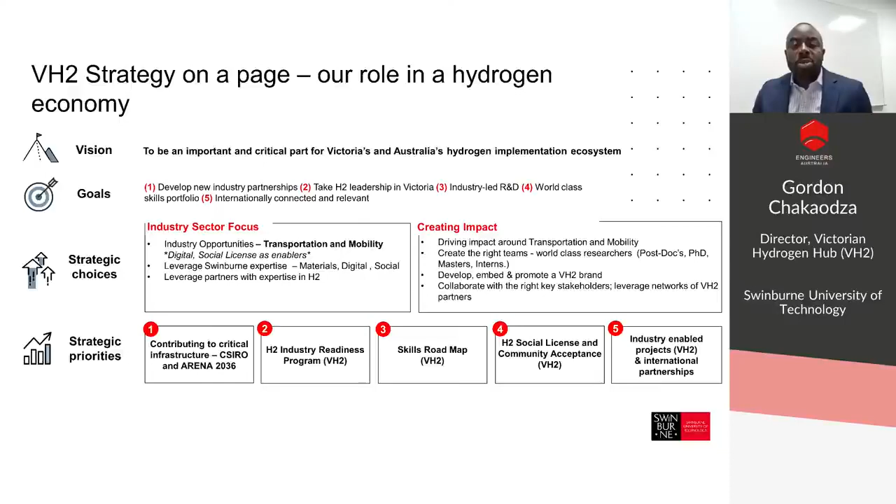Through our PhDs, we'll be working with industry to look at how we can work with industries which are hard to abate. You can see some of the industries our PhD candidates will be involved in, such as decarbonization of ports, hydrogen application in aviation, steel making, skills, and continuing to build our modeling strengths.

So I hope that gives you a snapshot of the Victorian Hydrogen Hub. I would now like to introduce our first speaker today, Swinburne's Professor Hussein Dia. Professor Dia's research is focused on disruptive mobility and harnessing digital innovations to unlock potential opportunities for low carbon mobility. Professor Dia is a chartered professional engineer, amongst other qualifications, and has also served as a board member of ITS Australia. Please welcome Professor Dia.

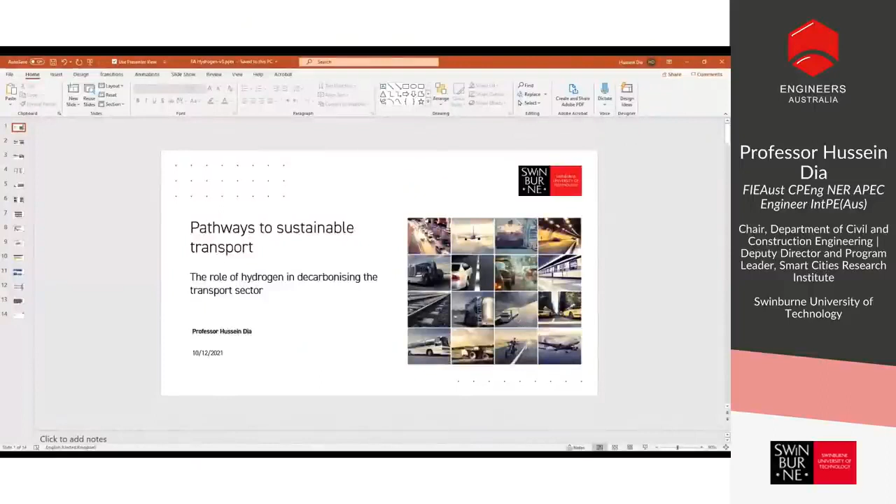It's my pleasure to be with you this morning to share some insights on the role of hydrogen in decarbonizing the transport sector.

Emissions from the transport sector continue to present major challenges to countries around the world. Overall, as of 2018, transport accounted for around 20% of global emissions. While some progress has been made in some developed economies to reduce emissions from transport, some emerging economies are actually moving in the other direction and contributing more. So that remains another challenge.

Around 75% of transport emissions, as you can see in the slide, came from road vehicles, approximately 45% from road passenger vehicles, including cars, and around 29% from road freight. Aviation and shipping contributed equal amounts, almost around the 11% mark.

As you can see, these top three sectors are the ones that are probably most ripe for decarbonization. Good progress has been made with the road sector, and I think there are many challenges remaining with shipping, aviation, and also road freight, where hydrogen can play a big role.

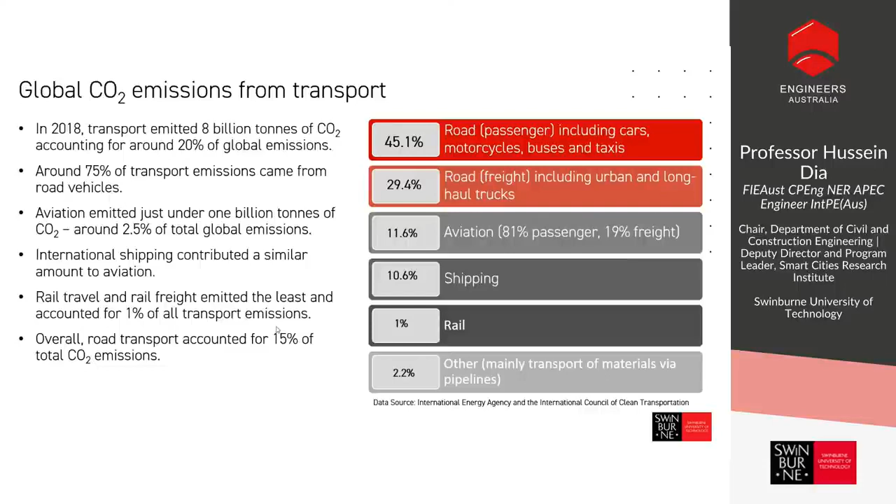In terms of the local landscape, it is a similar story. Transport in Australia accounts for around 17% of all emissions, with passenger cars accounting for around half of those emissions. The situation is a bit further complicated in Australia in that the transport sector has been for a while one of the strongest factors in emissions growth.

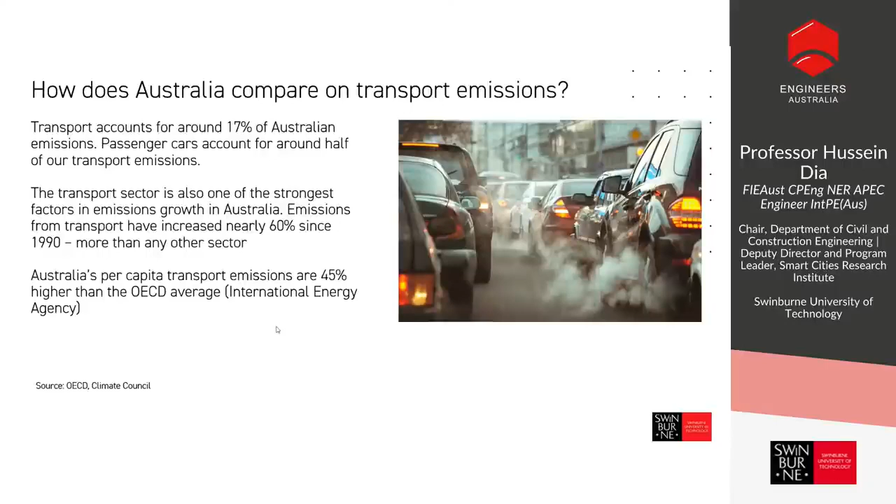Basically, emissions have increased nearly 60% since 1990, more than any other sector. And according to a number of studies, Australia's per capita emissions are 45% higher than the average OECD.

So Australia lags behind. In this particular scorecard, it ranked 20 out of 25 countries for transport energy efficiency. This scorecard looked at national effort, the decarbonization of buildings, industry, and transportation. As you can see, transport is one area where clearly a lot of work is needed.

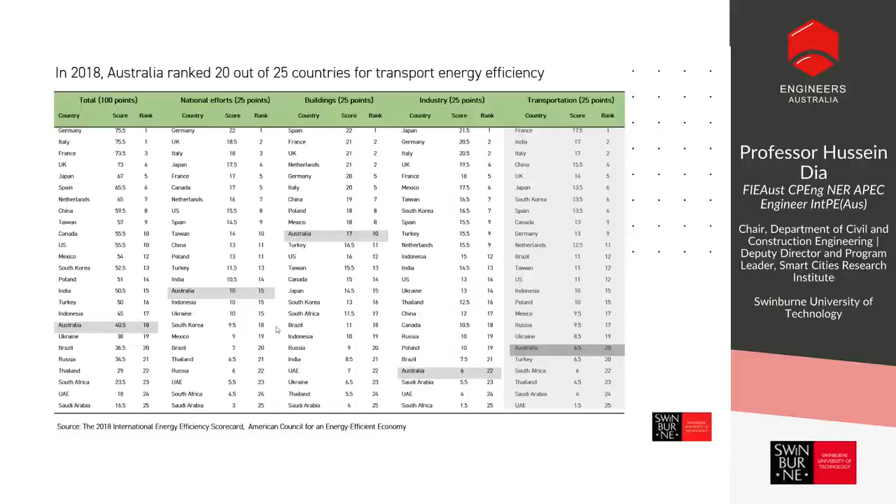Unfortunately, over the past maybe 30 years, the decarbonization of transport was not given a high priority on the agendas of transport planners and decision makers, who were basically dealing with much larger issues such as rapid urbanization, crashes, and congestion. Essentially, there was a lot of focus on the need to meet people's need for travel using motorized transport.

The good story, I suppose, is that over the last decade things have started to swing, and there is more focus nowadays on bringing emissions, energy provision, and consideration of climate change into the equation.

So the typical response policies in the past have been to build out of congestion, build more infrastructure, give more priority to the movement of vehicles, give more priority to motorized transport.

The new, more sustainable responses are more focused on managing the demand for travel, looking rather than just at the movement of vehicles, at the movement of people and goods, having a consideration of low emissions transport, more sharing, using pricing instruments, and so forth.

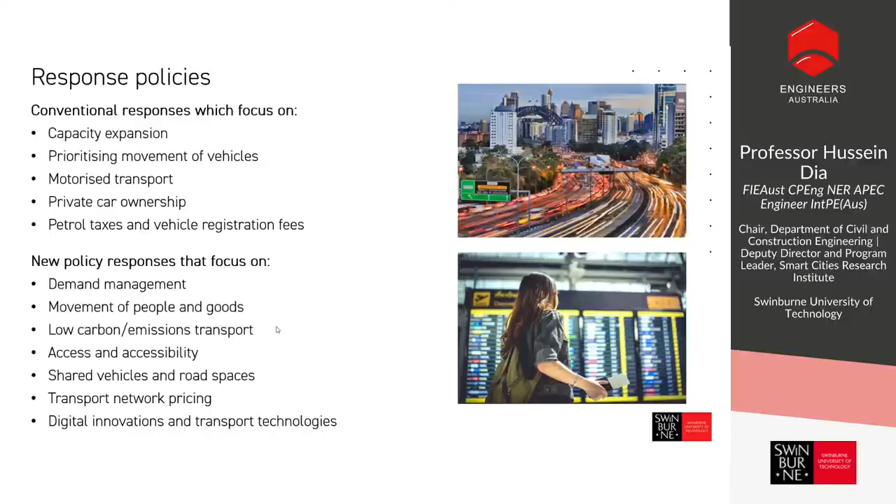In simple terms, we summarize the sustainable transport framework under the avoid, shift, share, and improve policies. So with avoid, you're reducing the need for travel, which is something we have experienced over the past two years by working from home. So telecommuting is part of the equation.

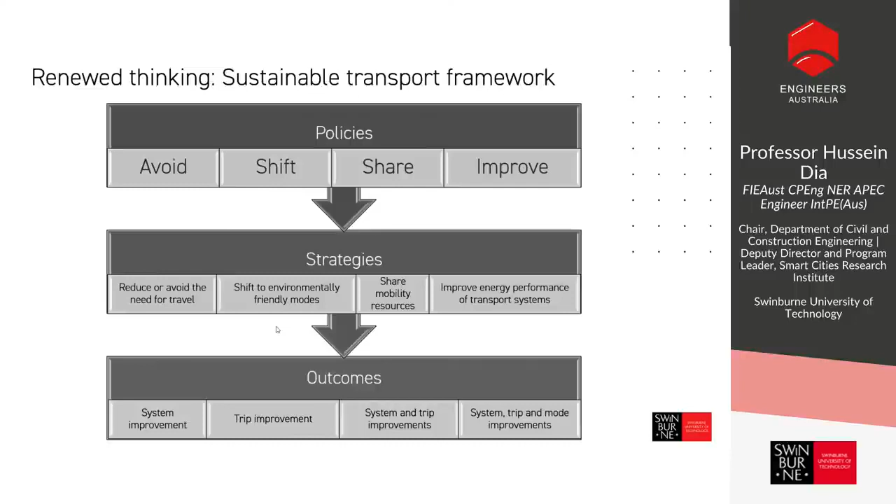Other strategies are to shift from energy intensive to more environmentally friendly modes, to share mobility resources, and improve the energy performance of the transport systems.

So we've been doing some research on this and looking at where to essentially target the research effort. We found that the avoid, or reducing the need for travel, strategies could actually pay the most dividends. So this is examples like travel demand management, telecommuting, virtual mobility programs.

The shift strategies involve shifting from private cars to public transport, to micromobility, e-scooters, e-bikes, walking, cycling, and so forth. Then sharing of resources - we've seen that over the past 10 years with the likes of Ubers and car sharing programs, ride hailing, and so forth.

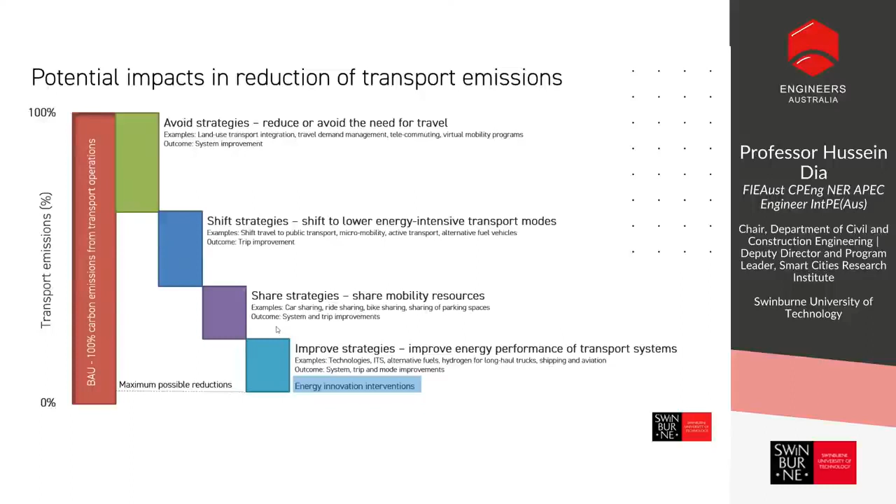And the final one, where technologies and alternative fuels come in as well, is to look at the improve strategies. This is where energy innovations come in. As you can see there, I haven't assumed that we're going to reach full reduction from 100% business as usual today over the next 10, 20, 30 years. It is possible that we won't get exactly to zero, but the intention is to get as close as possible to that.

This brings in the hydrogen equation as well. Hydrogen is expected to play a big role in decarbonizing a number of industrial and transport sectors. As you can see here, this is a big shopping list of possible use cases where hydrogen can be beneficial. As you can see on the right, aviation and shipping particularly, and land transport are part of the mix.

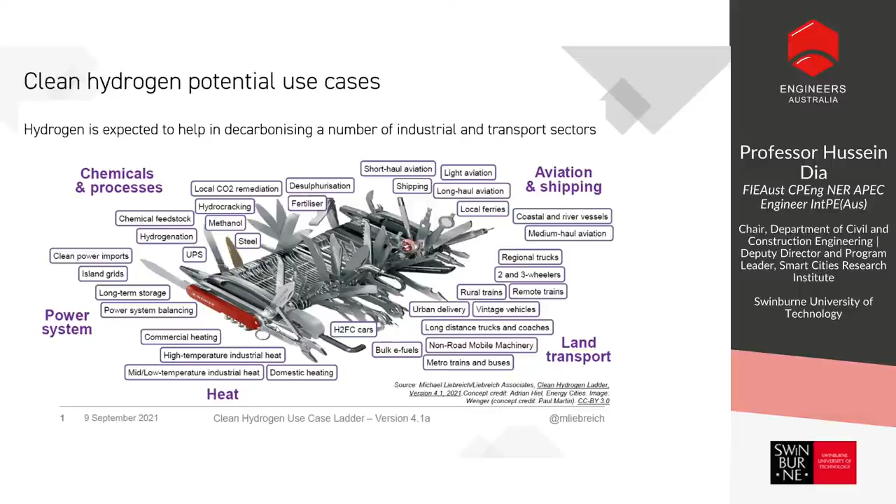Hydrogen could play a very big role in some of these use cases, and it could play a minor role in other applications.

I think particularly as we look at decarbonization of the transport sector, three of the biggest challenges remain shipping, aviation, and long-haul freight, where we still need more research clearly.

This diagram essentially shows that as you climb up this ladder, the use cases become much more challenging to decarbonize, but at the same time they open opportunities for hydrogen to have a role. However, hydrogen would need to compete with other alternative or new technologies or solutions that are being proposed.

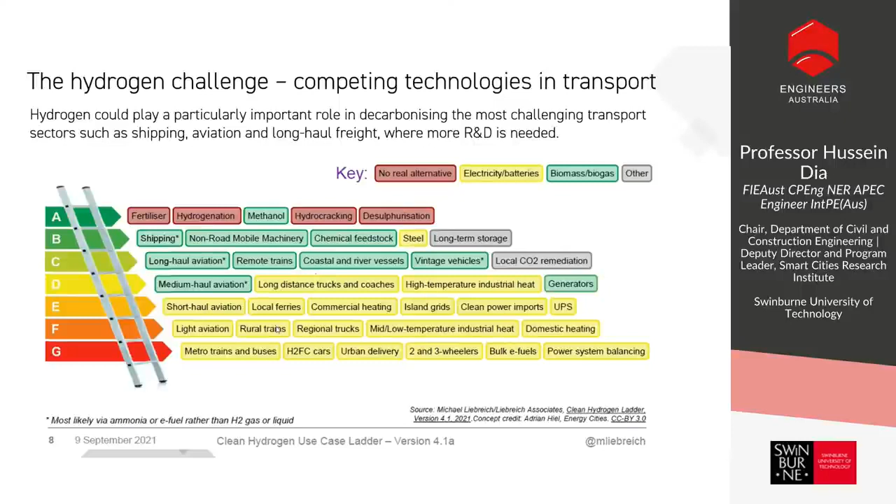It needs to compete based on cost, and in transport based on range, where it actually has the upper hand compared to other solutions, as well as safety, public acceptance, and so forth.

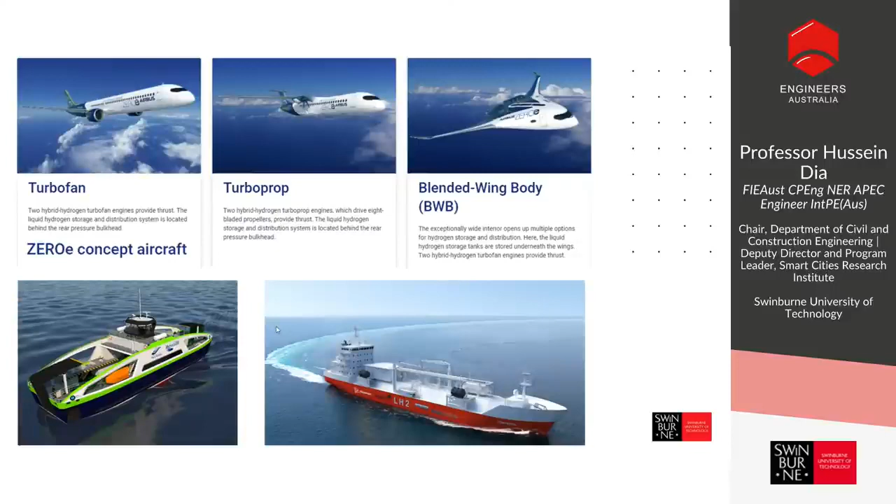When we talk about some of the current research in order to essentially establish which use cases could have the best or most impact, one way to address this, which we're doing through a current research project, is to look at life cycle analysis or assessment.

This particular project is looking at using the GREET model, which is a life cycle assessment model developed by the Argonne National Laboratory in the US. To our knowledge, it hasn't been calibrated for Australian conditions yet, though it has been used widely overseas.

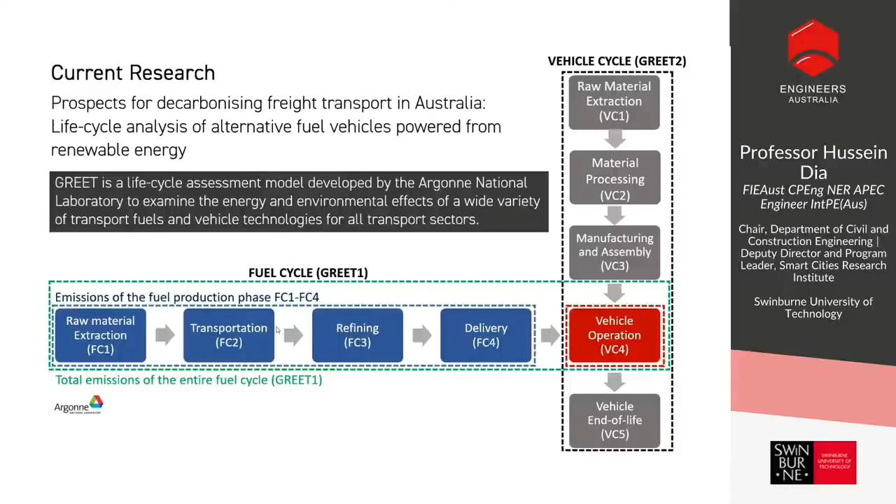This project would look at using this particular model to examine the prospects for decarbonizing the freight sector in particular, using renewable energy.

Before I leave, I would like to leave you with a thought. Even if we make each and every one of these vehicles hydrogen or electric vehicles, we are not going to be able to solve a lot of the challenges I mentioned before. One of the difficulties we have, for example, is that in Australia, if you stand on the side of the road and look at how many people are in a car, it's on average 1.2 to 1.4. So around 80% of car journeys to work have no passengers.

So we need a holistic approach. We are all for alternative fuel vehicles, but they need to be part of a holistic solution where we also look at the sharing of resources. And also, because we are going to be relying on renewable energy, we need to select applications where there will be the best return on investment, if you like, and also the best return on the conservation of resources.

Thank you for your time. This concludes my presentation.

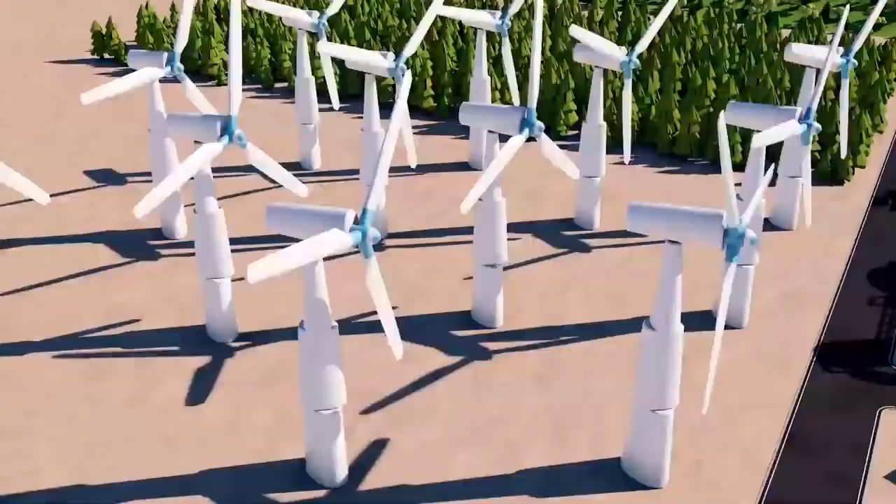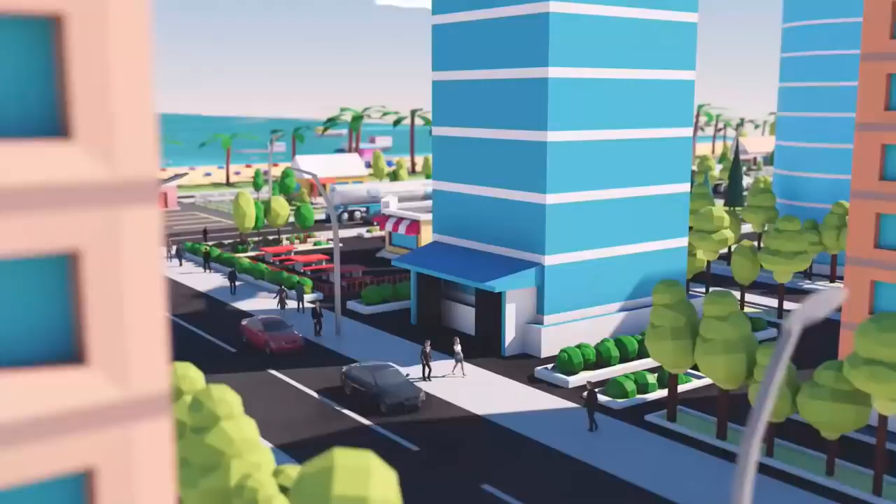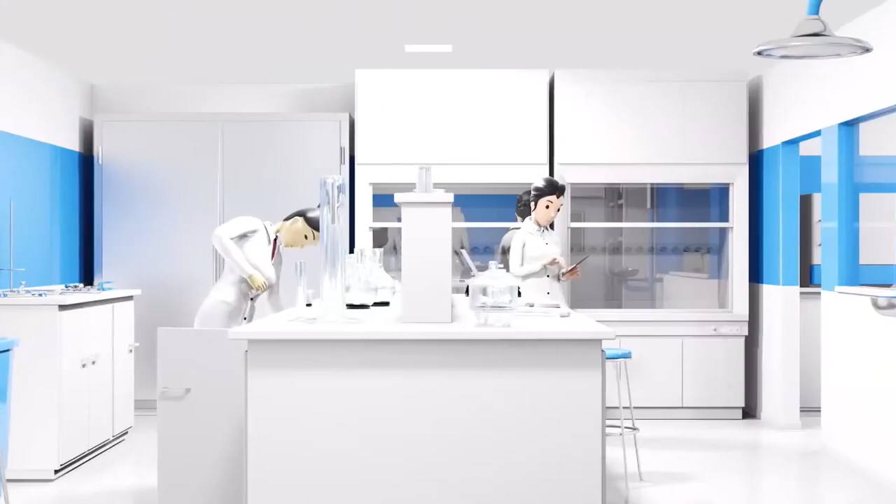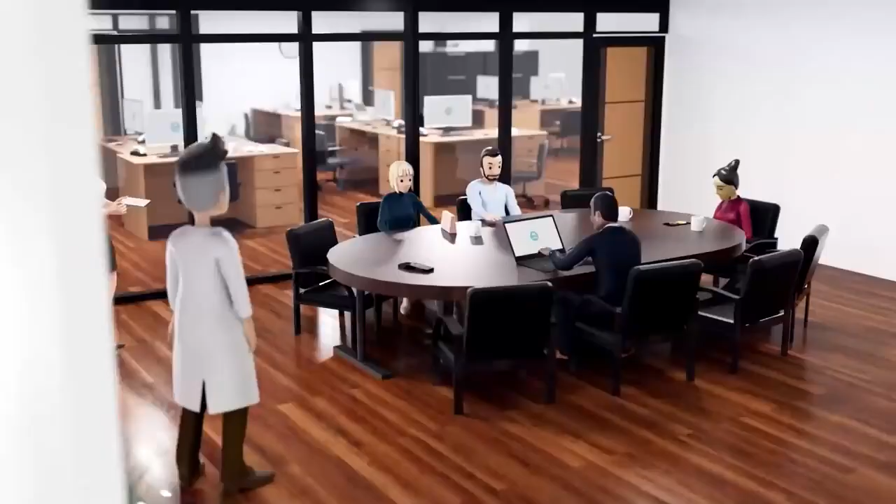Tackling climate change means we have to work hard to reduce our greenhouse gas emissions. We've made huge strides in the use of renewables to produce electricity, but some sectors are harder to decarbonise. This is where hydrogen comes in. Hydrogen can be used in a variety of industrial and domestic applications, and importantly, whenever it's used, it produces no greenhouse gas emissions. Australia is perfectly positioned to establish hydrogen export supply chains, which presents real opportunities. It's estimated that a clean Australian hydrogen industry could create 8,000 new jobs, generate $11 billion in GDP a year, and reduce greenhouse gas emissions. With a strong global market pull, technological readiness, and an appetite for the potential of hydrogen, we're at a critical stage. Challenges remain, however. Hydrogen is still expensive to produce relative to current fuels, and using it requires new technology and infrastructure. CSIRO's Hydrogen Industry Mission has been created to help focus research and development on solving these challenges to accelerate the development of Australia's domestic and export hydrogen industries. With our partners, we're supporting hydrogen knowledge sharing, informing best practice through feasibility studies, demonstrating hydrogen technologies and infrastructure, and delivering practical research which helps de-risk hydrogen industry investments. The mission's success depends on strong collaboration across industry, research, and government. For more information on how we're looking to collaborate, visit our website.

What we're here talking about today is, of course, demonstration projects. The phase, the stage that the industry is at the moment, really, is demonstrating hydrogen technologies across many of those different value chains that we heard about previously.

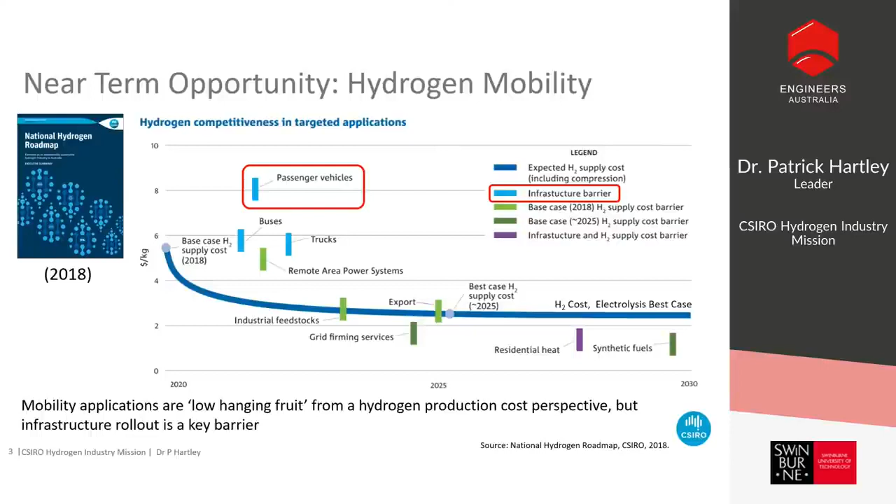So mobility is a near-term application. As we move to the right of this graph, and costs come down further, that's where hydrogen can play a role in many other industrial sectors. Recognizing that, back in 2018 was really the genesis of the project we're here talking about today.

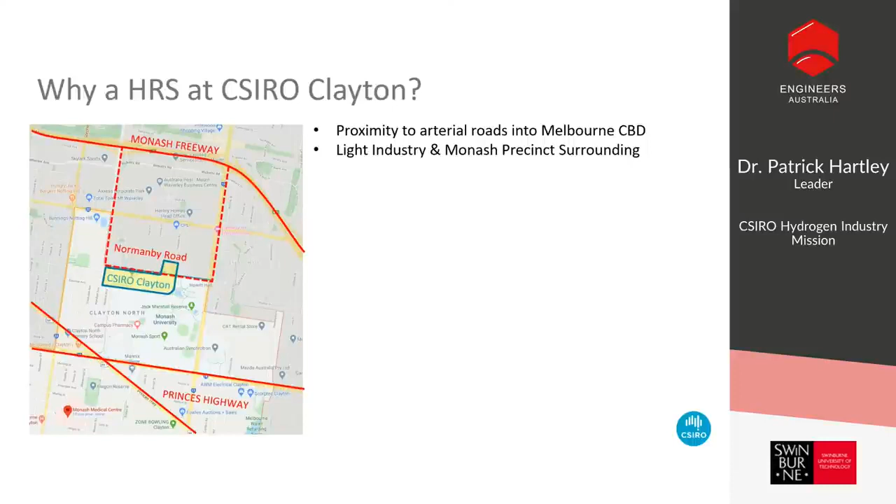We felt there was an opportunity for CSIRO to leverage our infrastructure and our skills. We've been working with hydrogen for many years from a research perspective, and our site in Clayton, where I'm normally based when I'm not looking at hydrogen liquefaction plants, is actually a pretty good location for installing refueling infrastructure. We're very close to major arterial roads heading into the Melbourne CBD, the Monash Freeway and the Princes Highway, to the southeast of the city, about 20 minutes away. We have Monash University to our south, and around us to the north is a kind of light industry area, so it's actually quite a good spot for allowing people to try hydrogen technologies and hydrogen vehicles.

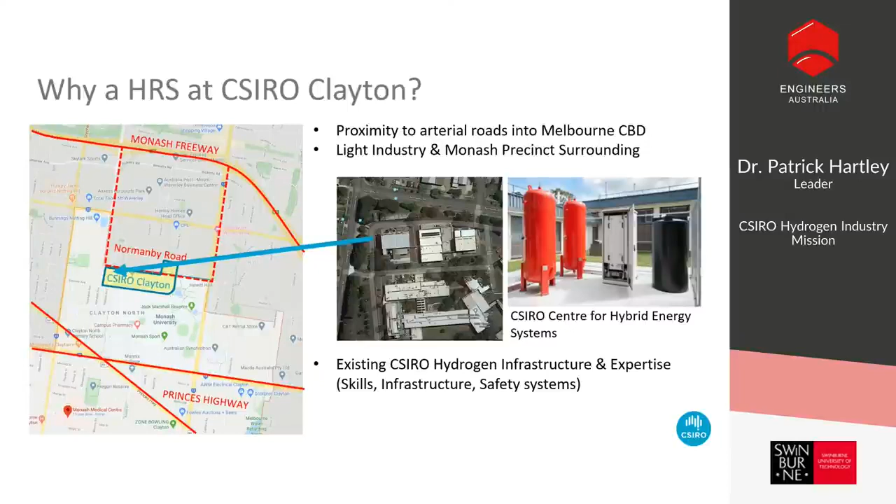As I mentioned, we've got existing infrastructure, things like our Centre for Hybrid Energy Systems, which already has hydrogen technology under development as part of it, all on that site. So we're well equipped with the skills, the infrastructure, and most importantly, the safety systems to install things like hydrogen refueling systems. The project concept was that we wanted to couple an end-use demonstration, a commercial demonstration effectively of hydrogen refueling, with research and development.

You can see here how that works. We have a building which is very much a part of the Victorian Hydrogen Hub, which we're fitting out with hydrogen equipment and infrastructure, where we will be demonstrating hydrogen production, storage, and utilization technologies, stitching those together with an end-use demonstration of a real commercial application in vehicle refueling.

I'm glad to say we haven't got our refueler yet, and we'll come to that in a moment. But we already have a hydrogen vehicle in our fleet, which we've leased from Toyota. That's actually sitting just outside the window here, and very nice to drive, I must say.

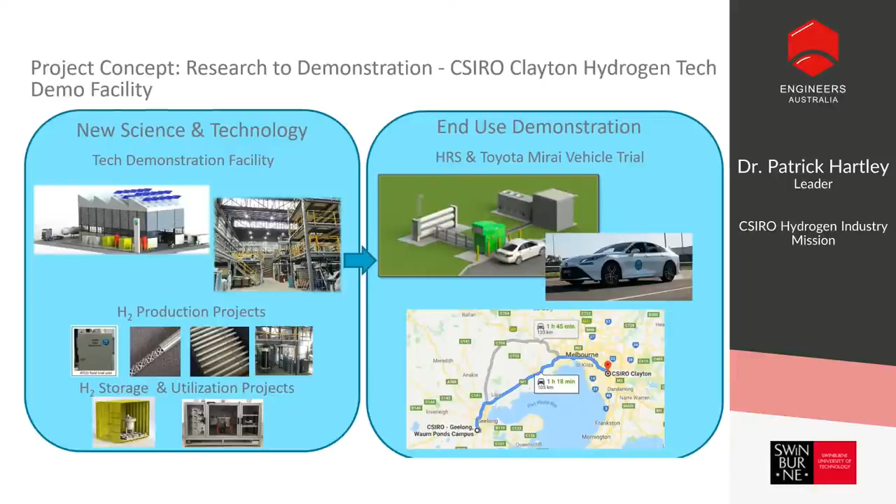You can also see here we have two sites basically in the Melbourne area: CSIRO Clayton, which I've been talking about, and our site down in Geelong as well. It's actually a really suitable distance for travelling that hydrogen car back and forth. Importantly, the current refueling system here in Melbourne at Toyota's plant in Altona is midway between those sites, so it's a really good location for trialling hydrogen vehicles.

Overall, the project was given a real shot in the arm in February this year with the announcement of the Victorian Hydrogen Hub and the partnership with Swinburne—very much a collaboration with Swinburne University. The refueler will be located at our site in Clayton, and we'll be working with Swinburne and many other partners to install technology development and demonstration projects within the building. The funding from the Victorian State Government was a very important part of that, which came to Swinburne and helps us leverage CSIRO's investment in the refueling system. We'll hear a little bit from Sean Blythe in a moment about the development of the system.

I'll give you a quick overview of the project timeline, where we've come from and where we're going. We really started working up the concept through 2019, establishing the idea and concept, securing support from CSIRO for around half the costs of the refueling system. We worked through site assessment surveys and an industry expression of interest with GHD, a large consulting company, and we were ready to go essentially towards the end of 2020 with our tender.

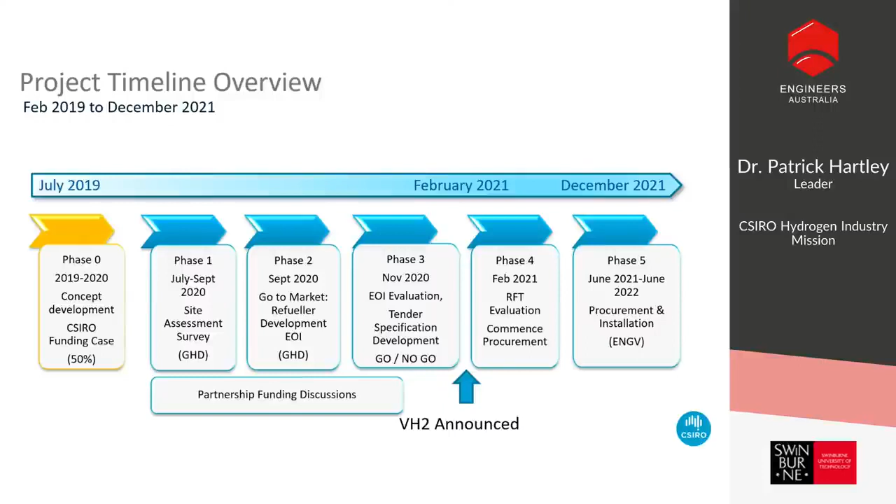With that, I'll hand over to Sean Blythe at ENGV, who can tell us a bit more about the technical details of the refueling system, which is currently under construction. Over to you, Sean.

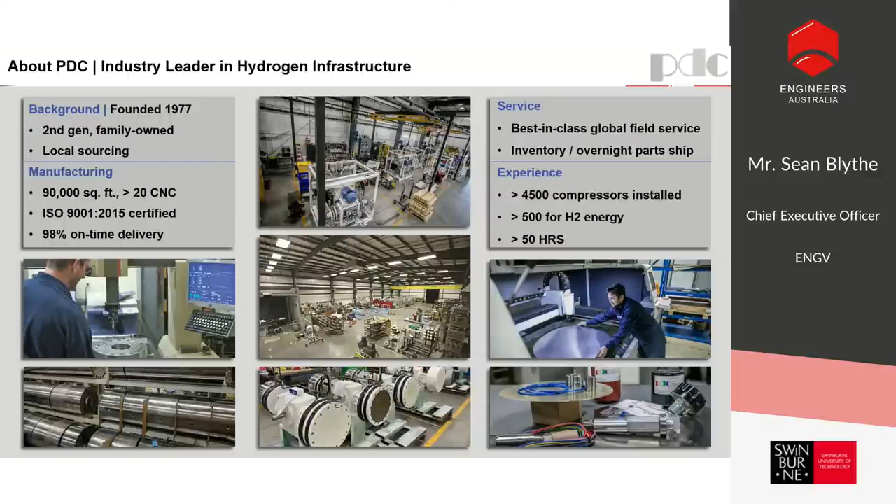Not moving. Oops, sorry, I went too far.

It's really important when we talk about hydrogen refueling that we refer back to where the industry has come from and what technology is actually being deployed. A primary component, assuming you've got the electrolysis being produced safely and efficiently, is the compression. The compression bit, in all honesty, is not the difficult bit. The more challenging part is integrating the discrete parts of the solution into a complete solution that gives a great refueling experience that's safe and reliable.

That's one of the issues identified by PDC, and why they developed what we're actually deploying at CSIRO, which we call SimpleFuel Fast, an all-in-one refueler, very similar to the middle picture there.

For your reference, we were also fortunate enough to be selected by ActewAGL to build the first public refueling station in Australia, commissioned in February, March this year during COVID time. It was rather difficult and challenging, but we achieved that. That's refueling 20 Hyundai Nexos at the moment in Canberra, and it's operating quite well, with a few little issues that we're progressing and improving, like we always do on the first units in any country.

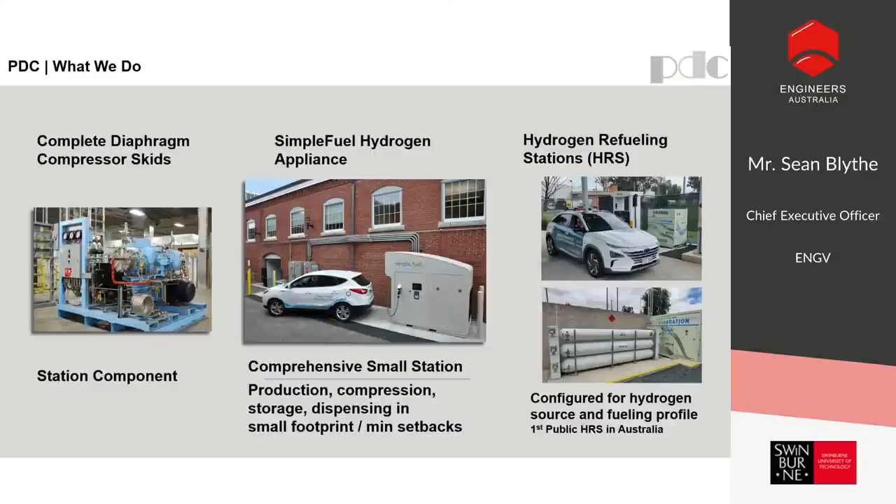One of the opportunities and challenges for the CSIRO project was the location - a great in-principle location, but a brownfield site. That's created an opportunity for us to learn and build the learnings for the industry. It's nice to have new concrete and new sites, but often this infrastructure has to fit within existing sites, locations and environs. One of the strengths of a modular, small, scalable solution is it enables very small setbacks and the like - one reason we're keen to deploy these units around Australia and excited to be growing that market.

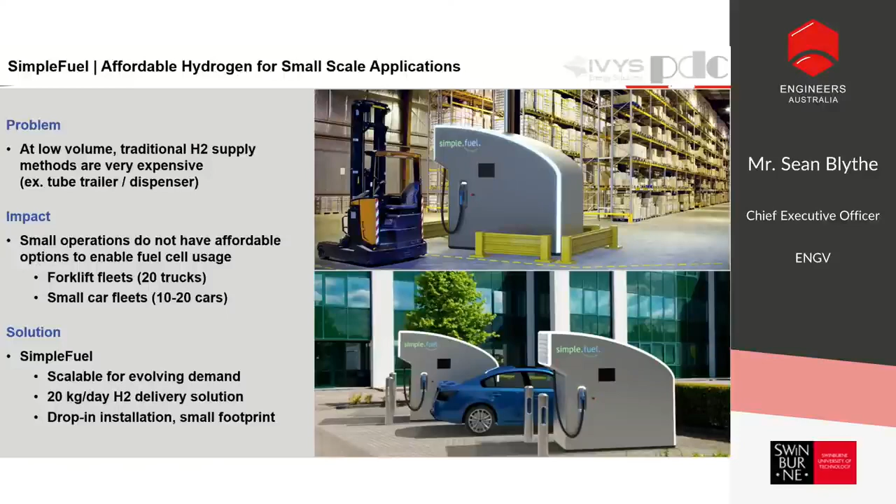From a technical perspective, what's different about the SimpleFuel versus standard applications? To our understanding, this is the only such unit being developed around the world. There's approximately 10 or 11, I think, being deployed now. We will be deploying this - it's in build now in the USA, for 2022 in Melbourne, as has been stated.

The SimpleFuel is very unique in that it actually has an electrolyzer inside it - a Plug Power 20 kilogram per day production unit. So we're producing hydrogen on site in a small PEM electrolyzer. We're compressing it and storing it adjacent to the actual compressor and electrolyzer unit. The hydrogen then flows back in under pressure into the SimpleFuel, where it's pre-cooled and then fuels the vehicle.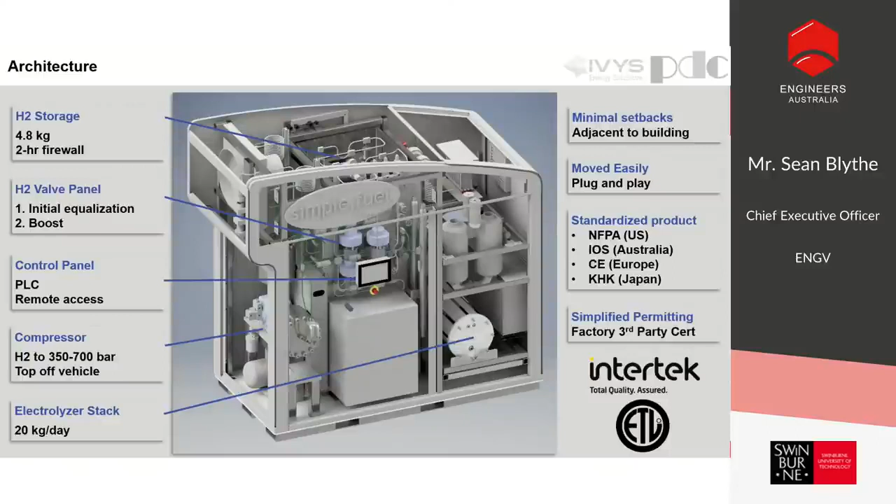It's effectively a fully approved appliance. PDC and IVYS worked with Intertek to have the unit certified to the appropriate standards. From an Australian perspective, we use ISO 19880 for gaseous hydrogen refueling, as well as AS 60079 for hazardous electrical and the like, and IECEx components.

It's very important from our lessons being involved in engineering and innovation projects around Australia - one key issue is actually how it integrates and operates in an Australian context. We very much do not take a helicopter view. We go very early, very hard to identify the opportunities and threats around the operability of the units. So this is a proven unit - we've already got one in Australia.

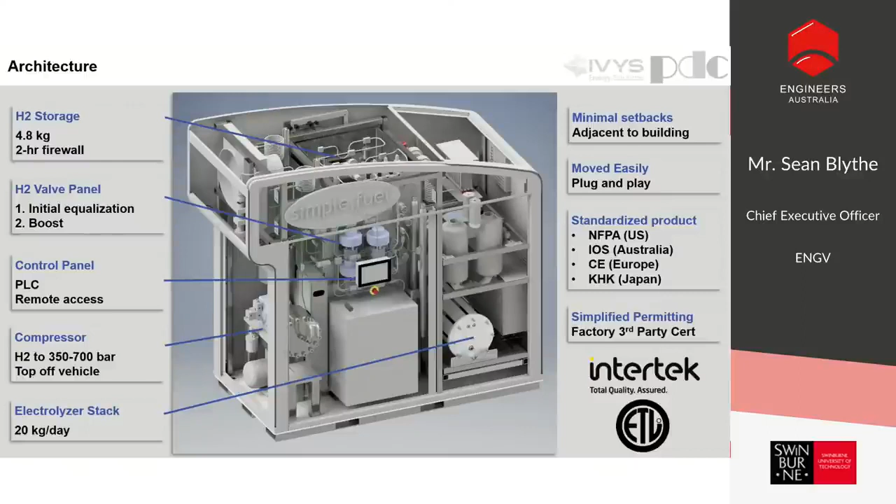Is it not going forward? Sorry, it's just frozen here. Okay, sorry. Okay, great. So thank you for that.

This slide actually talks about why the Simple Fuel. We're not suggesting the Simple Fuel is the ultimate answer for large-scale domestic car refueling. What we see the Simple Fuel as is very much a pathway to socialisation, testing fleets, and enabling sites for up to maybe 20 kilograms a day, or 5 to 6 cars a day, potentially to refuel. Obviously, the amount of gas being flowed is not too high, so we need to be very careful that we're not over-capitalising. We want to provide a deployable solution that ultimately can be scaled up, relocated and moved if required, but also provides a robust refueling experience.

Compared to a traditional hydrogen refueling station, which we also supply, it's very critical in our view to get a base of refueling opportunities for customers to experience, and to demystify this thing called hydrogen mobility. So Simple Fuel and IVYS have recognised that, and they've developed this unit along that basis.

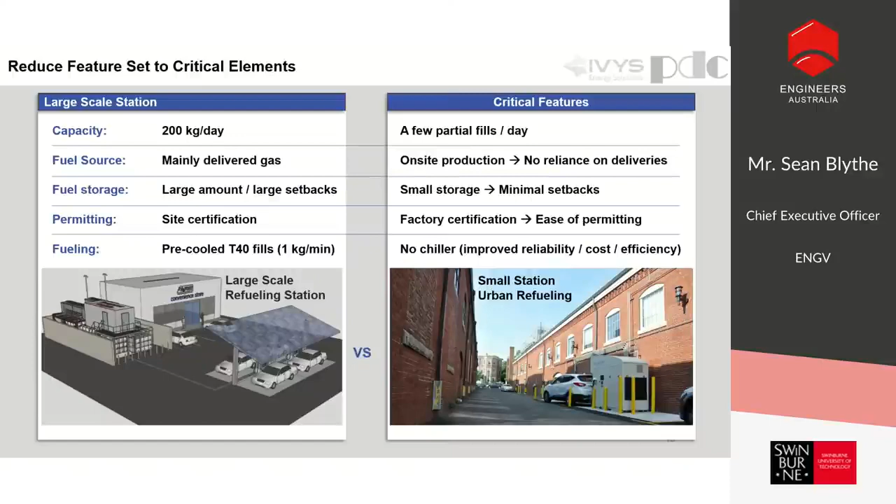One of the critical issues is not just about building it; it's about operating it and making sure when cars come to refuel, they get a full and reasonable state of charge. It's important to appreciate this is not a liquid fuel but a gaseous fuel, and how you refuel with gas is very much around peak refueling requirements within 1 hour, for example. It takes a lot more time to recharge the backup storage; you don't have a large liquid base you can just ram into vehicles. So the early engineering and design, the interconnections, are very critical. If you don't do that at the beginning, you will have a failed project. The station may work, but it might disappoint.

At this point in the industry's evolution, we're very keen to complete modelling and ensure that both the customers - meaning the people using the vehicles, not CSIRO - are happy with the response time and the refueling experience. That's one of the things IVYS PDC pay a lot of attention to and have modelled, with 24/7 call out if there's a problem as the industry is developing.

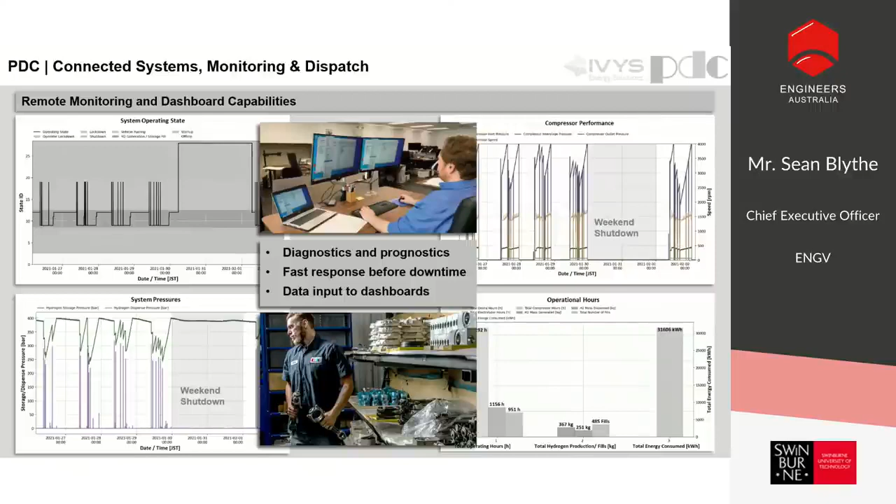So that's an example of one of the first units that's been deployed. That's actually in Boston, and it fills that car in about 20 minutes. It's called an ambient fill - not a fast fill unit, but certainly a very low cost option that enables a vehicle to get 2 to 3 kilograms within 20 minutes.

Rooftop solar - that's a place called Greentown Labs, an incubator setup with about 30 different innovation companies working together. That's actually where IVYS is based. The beauty of this solution is its ability to be located in very tight areas, due to the hazardous area classifications they've been able to achieve.

This is the 7th installation, a very similar installation, but with the Department of Energy, for those guys to refuel their fleets in the US.

And now we're on to the CSIRO site. So this is actually our modelling, and apologies for the Texan hat there. But as you can see, we do 3D modelling, hazardous area classifications, and all the like.

Typically, the way this solution works - renewable power will come into the simple fuel. Water comes along via this deionizer here, and flows into the electrolyzer contained within the simple fuel. It goes through the electrolyzer to produce hydrogen and oxygen. The small amount of oxygen is vented to a safe area. The hydrogen is compressed and goes through this easement into this cascaded storage facility here.

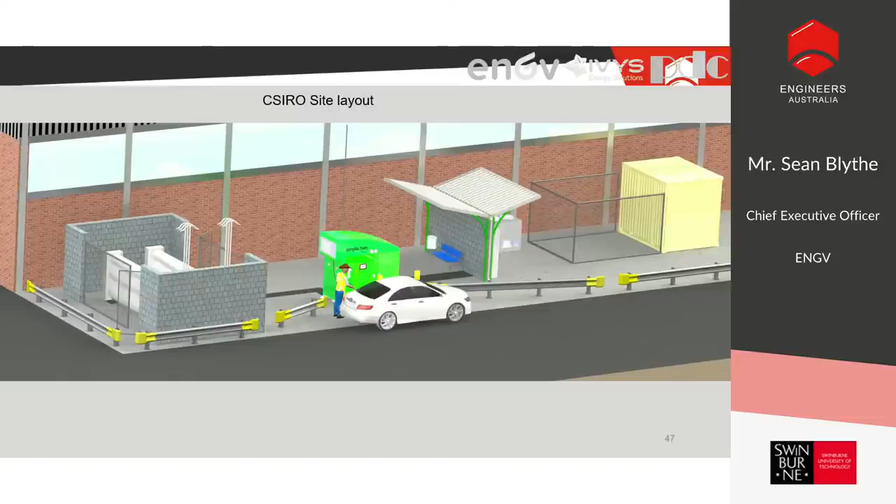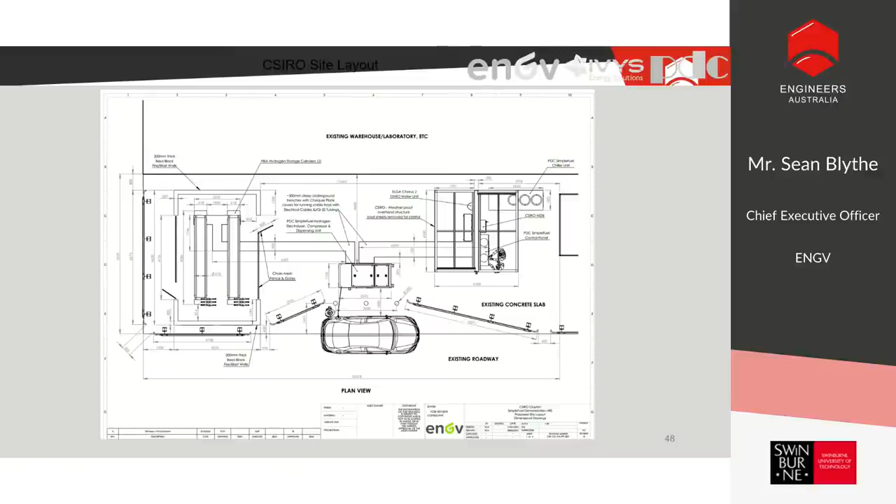So there's a lot of talk about hydrogen, but I would say certainly that the projects are happening. As I said, we're very excited to be working on this project because it ties in storage, compression, and risk assessments and processes. So we're getting better every time, and we're very pleased to be sharing this under such scenarios like this and with CSIRO.

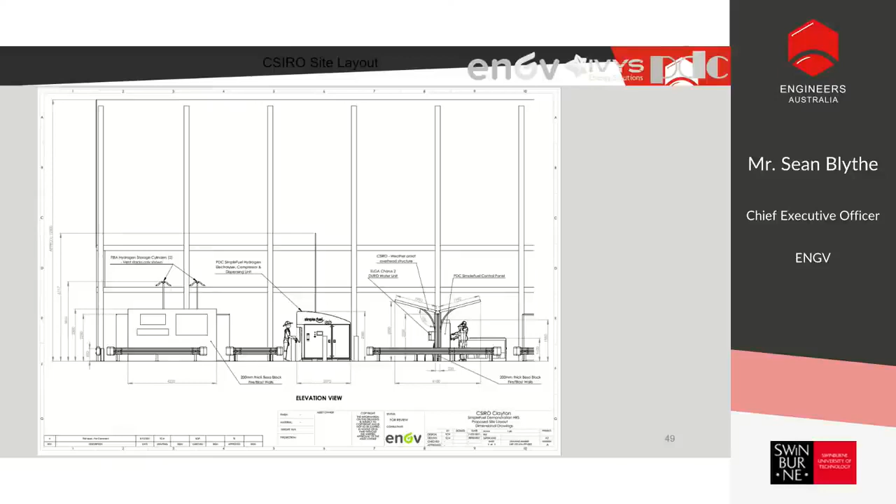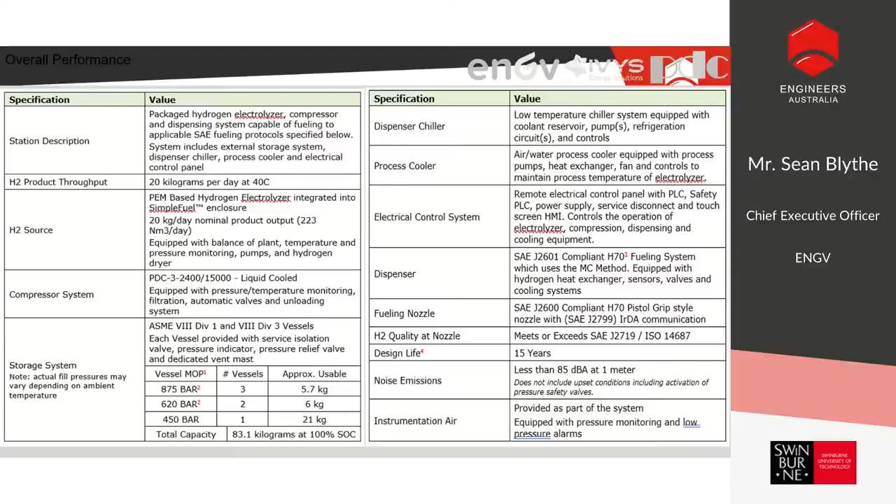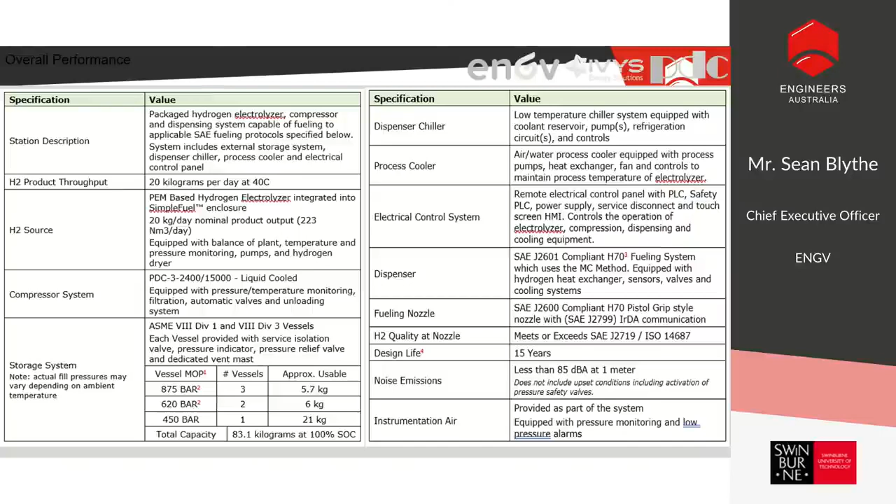So as I said before, it's not a liquid fuel, it's a gaseous fuel. So one of the things we need to be very certain about is that the scope is very well understood, the requirements and the standards. We've been through that. It takes quite some time, but we've worked very closely with our OEM partners from overseas, with CSIRO, with the operators on site, with the engineers supporting CSIRO, GHD, and our internal engineering team. So it's a very clear program, a very specific program, and a very verifiable program. That's just an example of the sort of process we would go through and what we would check off.

This is my last slide, so it's about lessons. The first unit is already in Australia. It will be commissioned in February and used for refueling forklifts, so we're very excited about that. In terms of electrical conformity and approvals, that's well and truly already completed. It is site specific, but from a generic perspective, we've got those approvals and certifications in place as well. That's really exciting and certainly de-risks this project.

In terms of the right-hand picture there, I thought this was a very worthwhile one to talk about. Everyone talks about the SAE refueling protocol that we must comply with, but no one actually wants you to test the stations on your own vehicles or the first vehicles. It was something we learned after we started the actual AGL hydrogen refueling station. So we had to invest quite a bit of money in developing a hydrogen station test rig. There's one or two of these in the US that I think cost $500,000 to develop, but without DOE funding, we had to very quickly develop our own hydrogen refueling station test rig, which is that picture down the bottom. What that does is in effect mimic the refueling system on a vehicle, and we data log and measure temperature and pressure in 1,000 bar rated cylinders inside that container.

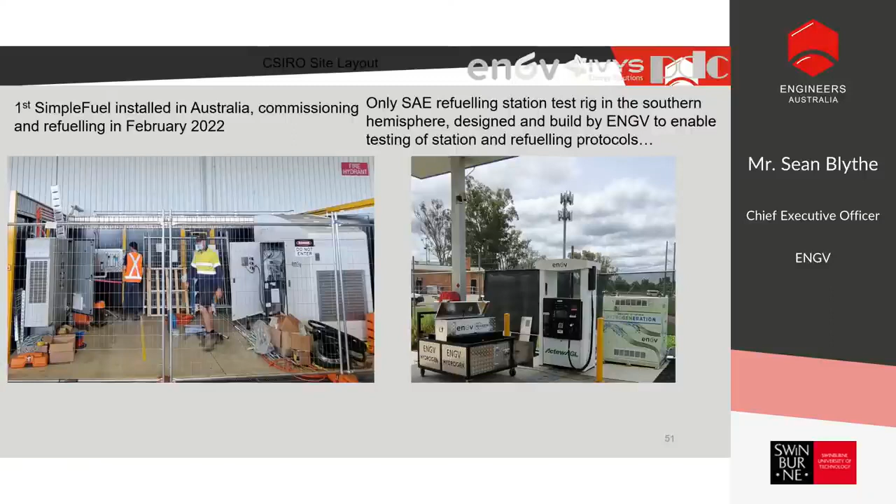So it's just a lesson about being first. When you're first, there's often things that are missed. One of the things we didn't identify was the inability to have a vehicle to actually confirm that the station complied and refueled to that process. Even though we had it certified in the US before it came, everyone wants to see what actually happens on site. So there's one learning. We've now invested in that, and that's available for other sites to also use to verify the flows, temperatures, and pressures to ensure compliance. Certainly, we're not saying we've got all the answers. We're very excited to be partnering with CSIRO, and we're really happy to be sharing our information as we go forward. So thank you for the opportunity to speak.

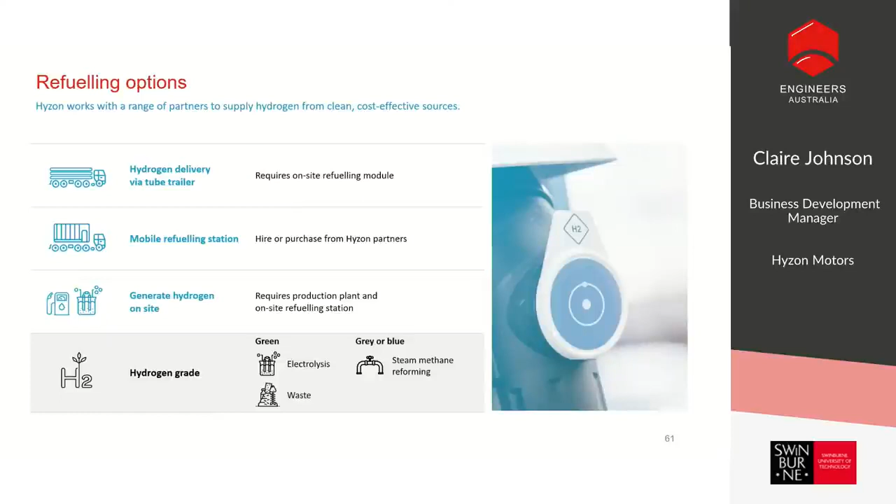To do this, essentially most of the customers we're dealing with to date operate back-to-base models. They're all generating their own hydrogen. They have a single refuelling point with vehicles that return to their facility each day. That really means we can work with them in developing stations that are high utilisation, high throughput and minimal investment. But increasingly we're looking at logistics operations which are point to point, which means developing refuelling networks interstate, intrastate.

So what we're doing is working with hydrogen producers, hydrogen infrastructure suppliers, and oil companies around how do we site these stations across Australia, and what kind of hydrogen we produce. Obviously our preference is for low carbon hydrogen, and exactly what are the best models to achieve this. So we are looking at the Hydrogen Hub model as really the best way forward, which concentrates producers and users of hydrogen and allows us to scale up both infrastructure and vehicles very, very quickly.

And so we're working with a number of the port operators across Australia as an example, which are fast tracking their development towards hydrogen export and wanting to dabble in vehicles as a starting point.

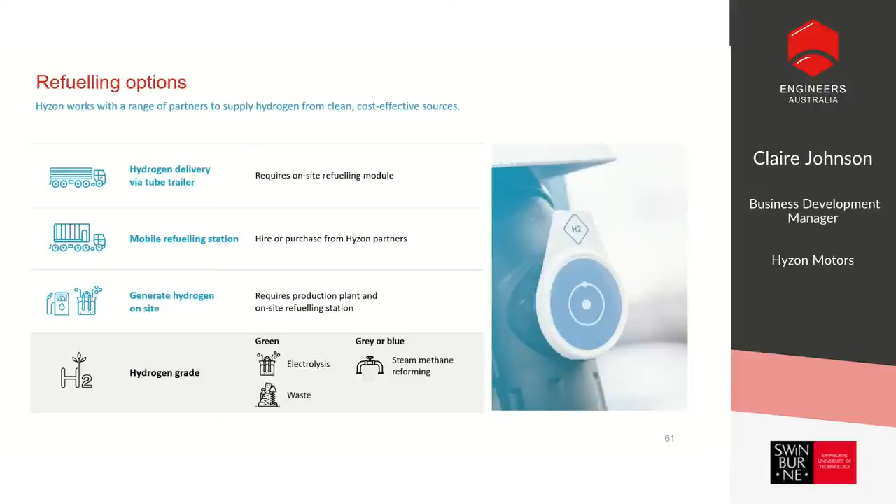So Hyzon is scaling up its presence in Australia. We currently have a team of about 20. Our headquarters are in Melbourne. We're really keen to talk to fleet operators around their transition to zero emission vehicles.

I think the most important point is this technology is available today and is being deployed into Australia. So it really is about how do we familiarise operators with hydrogen technology, address any concerns around the feasibility, and really show that these vehicles can be a one-for-one replacement with diesel and will be the future of commercial mobility going forward. So thank you.